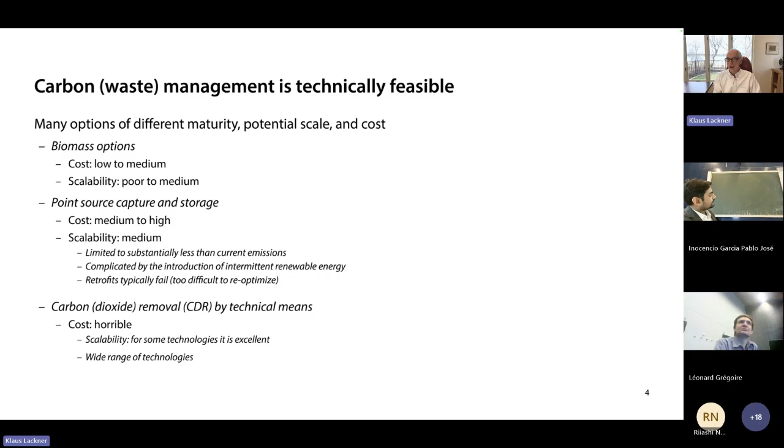So we have to get order of magnitude lower costs before that actually is viable. If you look at these technologies, there are a number of them available. They have a wide range of environmental footprints and carbon accountability.

If you look at ocean alkalinity, the accounting is quite complex. The duration of how long that excess alkalinity actually stays in the ocean can be debated. Some people argue it will take tens of thousands of years. Others argue that all the ocean will flow through a coral reef, the surface ocean, in the next few hundred years. And there's no guarantee that corals couldn't reset the alkalinity to where they want it to be. And it has an unknown, potentially large environmental footprint.

If you go to accelerated weathering in soils, that certainly can collect CO2 and can store it, presumably for quite long times. Accounting is now very difficult because you basically have to believe that it does what you think it does, and that it didn't flow away and get out of your ability to make contact with the atmosphere. And it potentially has a very large environmental footprint because you are basically spreading over agricultural fields what other people would call mine tailings.

Then you can go to ocean carbon capture with geological or mineral storage. I think here the accounting is quite straightforward because you have the CO2 in hand after you did all of that. Of course, you don't have the indirect emissions, but quite frankly, they apply to all of these things. The indirect emissions, which you get out of life cycle analysis, are very complicated and are very hard to get accurately accounted for. And the same is true for direct air capture, again, coupled with geological or mineral storage. The accounting is simple, again, except for the indirect emissions.

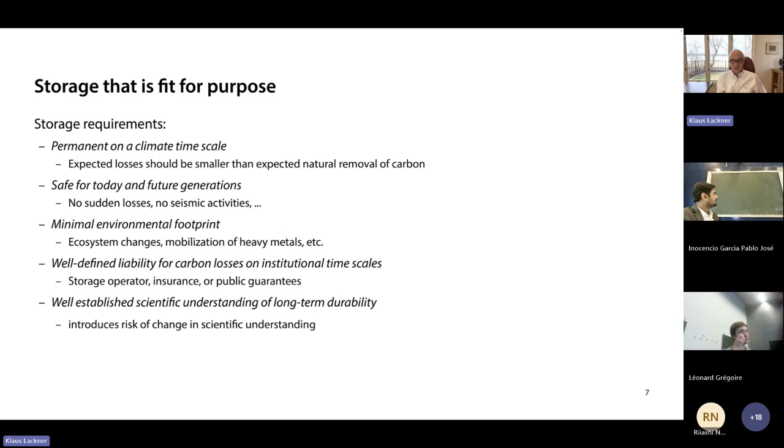I think there has to be a well-defined liability for carbon losses on the institutional timescales. You could do this with storage operator liability or public guarantees. And you need a well-established scientific understanding of long-term durability, right? That introduces, by the way, the risk that over the next 100 years, there's a change in scientific understanding, and we do have to make an adjustment for that. In that case, I would argue that carbon is lost, and I'm particularly suspicious of carbon storage technologies that promise 500 years, because I do not know how to continue after 500 years.

But if you look at it, there are solutions which are short-term. There are solutions that are long-term. I would argue most geological storage fits that bill. Most mineralization fits that bill. But technical CDR is definitely stuck on costs right now. Cost reductions, and I'll discuss this a little more in a minute, need to be on the order of about an order of magnitude. If we don't get 10 times cheaper, then fixing the climate problem could bankrupt the world, or alternatively render climate damages unmanageable. And of course, that could then also bankrupt the world, right?

The strategy in many ways, in my view, has to be learning by doing. We can do a lot of science around it, we can debate it, and we can make it a little better here and there, but ultimately we need to just do it, and then things tend to get cheaper. Think of wind, think of solar, think of lots of other technologies, from washing machines to your computer. There's plenty of precedents, but there's no guarantee that it always works. Nuclear power, for example, didn't work out like that.

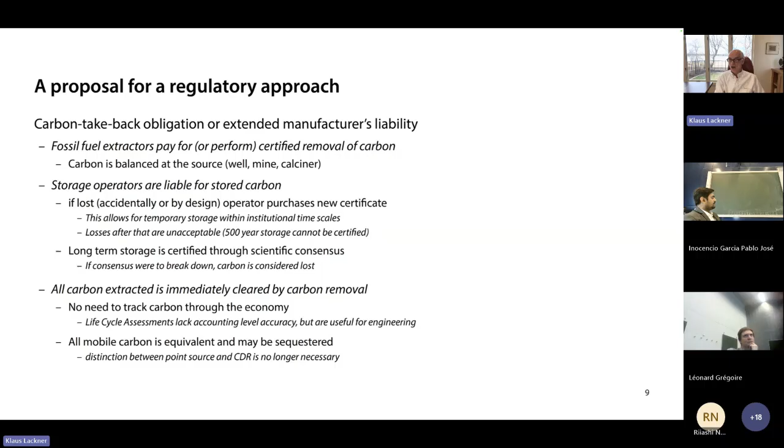And in this case, then also all mobile carbon is equivalent, and all mobile carbon may be sequestered. Right? The distinction between point source capture and CDR in a world which has gone that way is actually no longer necessary. So in my view, reducing the cost of carbon removal is that ultimate chicken and egg problem, right? Cost won't come down without regulations, and regulations won't be introduced until costs are low. So we do need in the beginning volunteers and niche markets where you can actually try things out and make it work. So here we have another proposal which we are trying to move forward and get on the table, and it's not all that easy.

We say we should differentiate from the start between legacy emissions, stuff which happened in the past, and continued emissions. And we build up negative emissions to remove legacy emissions as a public effort. That allows you to learn. That is sort of the voluntary side, and institutions and companies could help with that, right? You drive costs down through learning by doing for everyone, including industry, which will need it, right? In the process, you pay back the public carbon debt.

So take an extreme version of it, say we remove 200 years of emissions over 50 years. That means every first year, we don't have to be all that good because we remove 1800 to 1804. There weren't all that many emissions. As we climb up that curve, we are then 4 times faster than in real time, and in 50 years from now, we would have caught up, right? If we were to do something like that, we would get the learning necessary.

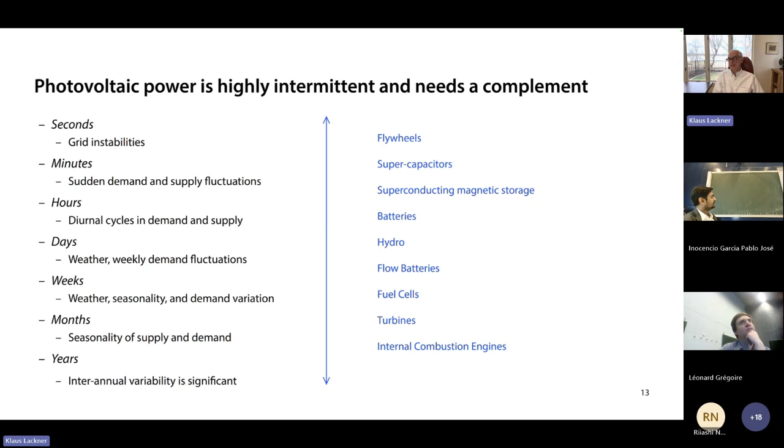Batteries will play a big role, but once you talk days to years, batteries are simply too capital intensive to make this work. I think the bottom end of that spectrum is undoubtedly done with chemistry. And I would argue there's an enormous advantage of being in liquid fuels, in other words, in hydrocarbons, because they have the energy density, they have the chemical stability, and they're easy to store, easy to move, and easy to transfer back to electricity, albeit at a loss of maybe a factor 2 or so, right?

So energy storage on the days to years scale is something they excel at. You can sit on an oil tank for a couple of years, and the cost of having sat on that is actually minimal. And right now, in the current environment, we all wish we would have more oil in storage than we actually do, right?

Energy for transportation, and it can apply to cars, trucks, ships, planes, and trains. And you may say, well, cars and automobiles are really out of that. Not really. I like one-on-one comparisons. Assume that fully electric car really works, and somebody comes along and says, I have this tiny little generator, maybe a fuel cell to get political sensitivities right, and it has 30 kilowatts, and I can keep the batteries charged while I go. Suddenly, that car lost 2/3 of its battery weight, probably a third of its total weight. It has a 1,000-mile, thousands of kilometer range, and it's all around better by having that combination. I think we will likely go back there if we can or need to.

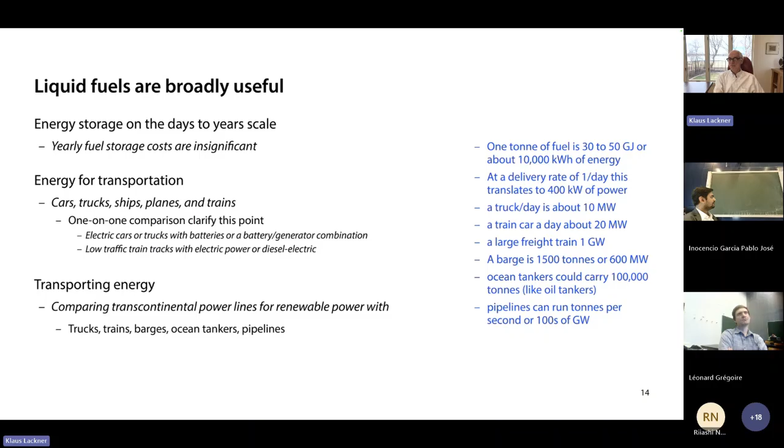And a transcontinental electric power line, which gathers photovoltaic energy over large areas and then stands empty 2/3 of the day, is not a good investment. So I would argue for that reason alone, liquids will play a huge role. And we engineers haven't quite figured out yet. We are trying to shoehorn everything in the grid when we really shouldn't. We should figure out how to bypass the long distance grid and make things work more locally.

So what's missing for such a picture, right? Cheap photovoltaic power, I would argue, is ready and is spreading fast. Conversion from electricity to chemical energy, think electrolyzers, water splitting to hydrogen and oxygen, but you have other options. That's technically ready, but there's little demand. And I think it's still too expensive for intermittent energy. You need to gain a factor 2 or 3 to make that really work. If you compare, let's say, alkali electrolyzers in Norway, they can run on cheap hydro, but they can't run unless they run 24 hours a day.

Conversion to useful liquid fuels with CO2 and hydrogen is close to ready. We know how to do this for 100 years. We can make methanol, dimethyl ether, alkylate fuels, diesel and jet fuel by various means. I think there's little demand for it right now because the oil is sitting there, but it's an established technology, and I would argue, and I'll come to that in a second, it needs downscaling rather than upscaling.

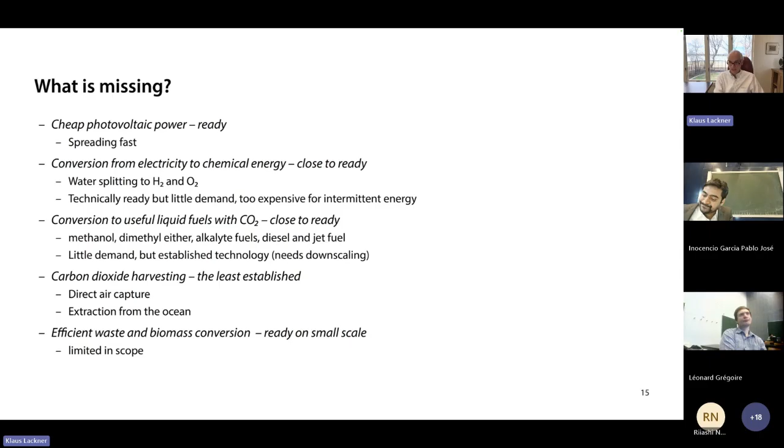I think the least established is carbon dioxide harvesting. Direct air capture, extraction from the ocean. That's where I think you have the hardest, the really missing link in this story. Of course, you could start with waste and biomass conversion, which lots of people do, I think it's ready on a small scale. It tends to be messy and make not the right stuff, and it's really limited in scope. So I would set that aside and move to the other ones, or be aggressive here too and convert it all the way to the right fuels. But ultimately, if you want to get the cost down and make all of these pieces really work, you need learning by doing to close the cost gap.

Right? And I think you want in every iteration, higher efficiency and lower cost. And one of the big questions one of my students looked into more than a decade ago now was the analysis of economies of scale versus the economies of numbers. It's numbering up versus size. And he made an argument that numbering up has real advantages which were not available 20, 30 years ago. And I think we should really look into that.

So if you compare sizing up versus numbering up, chemical engineers think about sizing up, right? And they have the concept of the economies of scale, which basically said that the cost is a function of size, and it's a power law in a simplified version where you simply say it's some power alpha, which tends to be 2/3, right? Numbering up relies on learning rate in manufacturing. It's an empirical observation that if you make the same thing over and over and over again, it gets cheaper.

And those folks didn't write down a power law. They said, well, if I double it, I get a factor epsilon, where epsilon could be around 0.8. So then, of course, I can say, well, the nth one is the first one times that epsilon to the log base 2 of that n, because basically for every power of 2, I get a factor epsilon. And it turns out I can integrate that and sum up the cost of all of the ones I built, right? And I put an approximate because I integrated rather than summed.

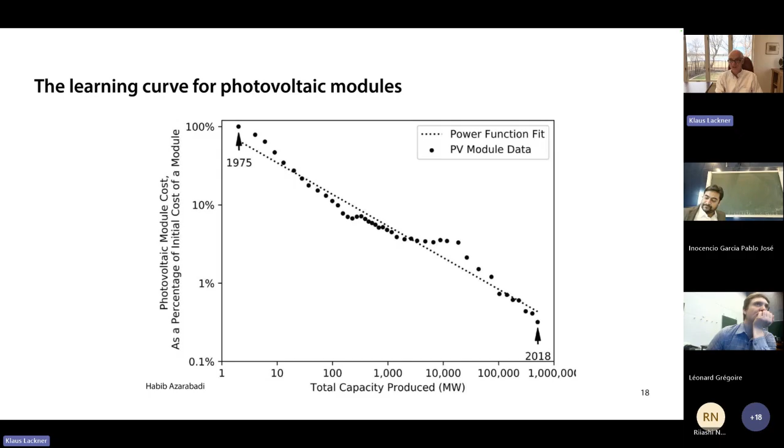Ask about the poor engineer in 1975. I'm coming back from today and say, I can tell you for a fact of the $1 you spend, 99.5 cents are gone. You tell me what you expect that last half cent you couldn't get rid of is for. They couldn't possibly do that even if they knew what I just told them. So bottom line is, we don't really understand how the learning curve comes about, but it's iteration and iteration. And of course, there has to be a floor. So you should add to that power law here the assumption that there is an irreducible cost, which just doesn't go away.

So why have people always thought bigger is better, right? Physics, I would argue, drives to an optimal size. And Eric Dahlgren, when he worked on it as a PhD, looked at many examples. And sometimes bigger is better, and sometimes bigger is not as good. It depends on your specific situation. And I can't help pointing out that if you look at a Fischer-Tropsch process or a Haber-Bosch process, what in the world makes a surface contact catalyst, which needs to shed heat, like to be in a very large tank, right? It really cries out to be smaller.

But personnel costs tend to drive you large, because a power plant with a gigawatt doesn't need 100 times as many people as a 10 megawatt unit. So as a result, I would argue, or Eric in his thesis argued, a large driver is cost of personnel. But automation pushes that the other way. In the 1980s, we couldn't have possibly automated that away. Today we can. And so how to optimize cost by numbering up or scaling up has changed in the last few years, because we have learned that ability.

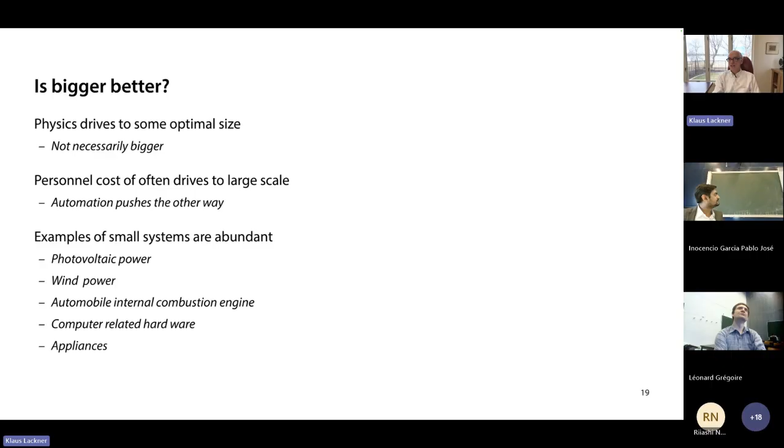And there are small systems, they are abundant, and they have dramatic learning. Photovoltaic power is an extreme case with its 24% learning rate. Wind power only got 14 or 15, and I would argue a large fraction of that is because they tried to get big and they didn't get all that big. The automobile internal combustion engine, I already pointed out. If you look at computer-related hardware, you get lots of examples. And appliances: your microwave has a little microwave generator, which is dirt cheap. Light bulbs are dirt cheap. The ingredients of your iPhone, your camera, the cost of these things have come down by factors of 100.

There's less risk in innovation. You can try out a prototype, and if it didn't work, well, you just wasted $10,000. If it turns out you need to build a $1 billion plant before you really know that it works, you better be very conservative in your choices. You can also drive modularity in many different ways. You can plug and play. You have compressors, all these subsystems, and you scale those down. There are far fewer scale-up issues. If you stay with a scale, the physics doesn't change. If you move from one physical scale to another, the physics tends to change.

But automation is now your new bottleneck, because if you make $3 worth of output, I can't have a person watching. You have to deal with every normal operation, and probably quite a few abnormal events need to be automated into your system, because you can't afford hovering over that machine. And of course, there are faster turnaround times, which means the premium for a long lifetime of your equipment suddenly goes away, which particularly at the beginning is actually important. If you think DAC today can get 10 times better, you don't want an old DAC sitting around from 10 years ago, because it is just too inefficient.

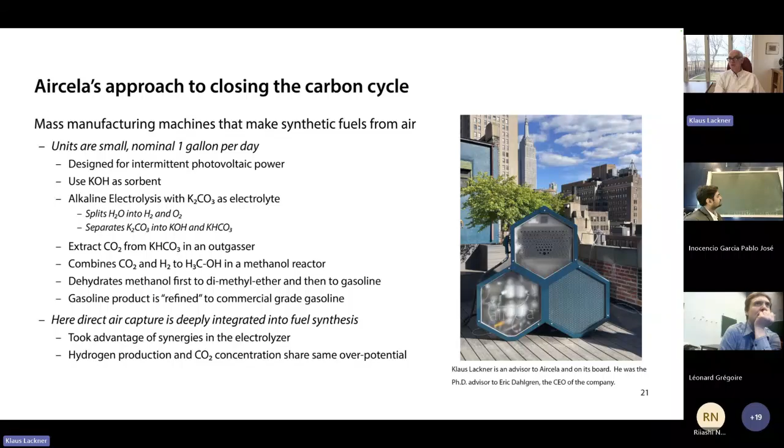So the lessons learned for direct air capture: there's a significant advantage in your energy balance if you need to make fuel, because you store a lot of energy in the fuel. And if you're 50% efficient in this, you're proud of yourself. And you can hide behind that the fact that carbon capture wasn't all that efficient. It greatly simplifies the problem.

Blowing air and thermal losses in sorbent generation are dwarfed by chemical energy demand. The kinetics, it turns out, is not an issue. It's no better than most DAC, but it's plenty good enough for these things. I would actually argue we sometimes overthink sorbents. Low-cost photovoltaic power is absolutely critical to make this work. Energy efficiency is secondary to cost in all of this.

Right? We are collecting energy, and we are not all that good at using it, but because it is so cheap, if it's a dedicated solar panel, we are not squeezing the efficiency, we are squeezing the cost. And I would argue generally direct air capture has to learn how to deal with that intermittent power. And we argue that simple is better. Alkali electrolyzers are much more easily managed than fancy high purity demand requirements.

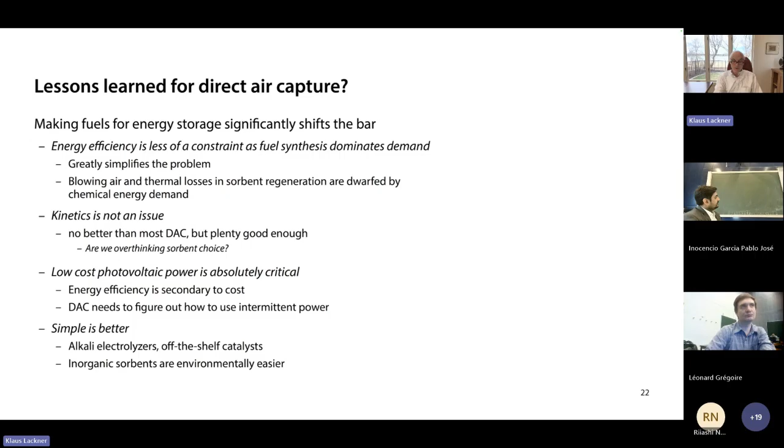And we use off-the-shelf catalysts. There's nothing fancy about our chemical reactions. Yet we made perfect methanol, which was clean, no formaldehyde, no ethanol. It was pure methanol after we squeezed the water out, which of course you have to do. And I would argue inorganic sorbents are environmentally easier, and that becomes quite clear looking at this system.

One of the other lessons we learned is that modular mass production lacks off-the-shelf modules. We are coming into a chemical engineering field. The units of operations only exist on the wrong scale. There are lots of things which are not difficult, but nothing is readily available. Compressors, pumps, heating systems, cooling systems, all of that, we have to reinvent the wheel, right?

The process design for small scales is actually different, but typically simpler because you have exquisite control over them. You can do things at 1/10 of a degree if you choose so. Low cost in electronics and appliances hints at savings, right? The new challenge is control systems. Everything has to be automated, but it eliminates the challenge of scale up.

And computer calculations, it turns out, are cheap. One Pi can do everything we need. Right? Sensors are often expensive, and we are spending a lot of time thinking about how to make that easier. And I would argue sometimes we want cheaper sensors and more calculations to calibrate.

Ultimately, it requires a paradigm shift, which is not just limited to DAC. We can think about this approach to desalination, to power, to all sorts of things. And I think this will create a revolution where the old dinosaurs will stay where they are, but new technologies will go small.

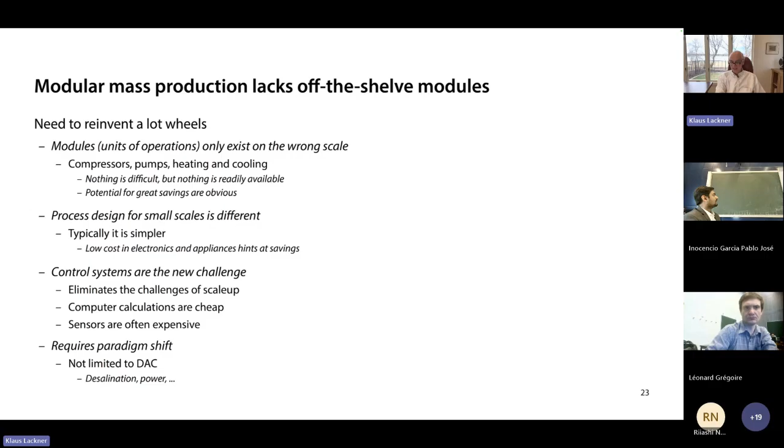I would argue in all of this discussion, and I'm running short on time, I'm afraid, is the DAC is the bottom. And I think we need to get it down to $100 a ton, whereas right now we are more like $1,000. And I would argue $100 is sort of a reasonable number. And one way of looking at it: how much does it hurt the economy if it had to do it overnight by simply applying it? Alternatively, some other technologies will displace it because they happen to be cheaper.

So if you can get to that scale, dealing with the problem is economically manageable. If you put another zero on and say it's $1,000, which is probably closer to where DAC is, then it would ruin the economy. So we have to get from $1,000 to $100.

And here now it matters, can you really get there, or is there an irreducible cost that you cannot get rid of? Of course, learning rates now matter too. Right? 20% learning rate implies a 10-fold reduction in cost requires a 1,000-fold increase in cumulative production. That's nothing. We are at kilotons a year, so we end up at megatons a year. Well, megatons a year are not climate relevant. That we are entering the scale of merchant CO2, which is used in industry. And moving from kilotons to megatons is not what does it.

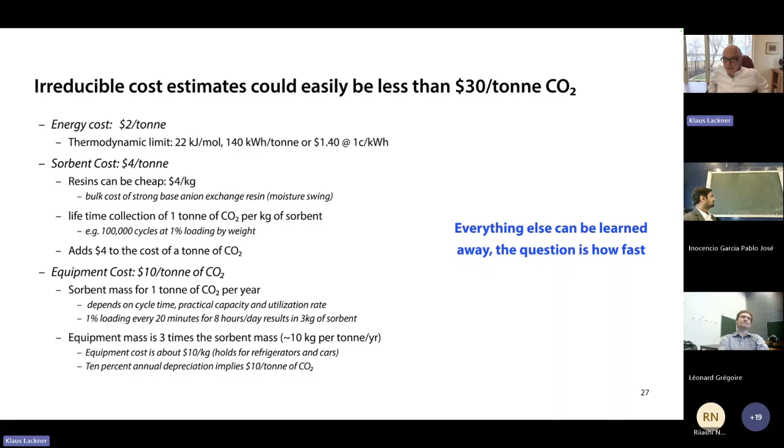And that in turn, I'm now arguing that I need 3 times the mass of equipment. And I think that's quite conservative. But empirically, we know that cars, appliances, all sorts of things cost around $10 per kilogram if they are mass produced. So taking that number and 10% annual depreciation, we're talking about $10 per ton of CO2. So adding these numbers up, I'm well below that $30 a ton. So I think the case can be made that the irreducible cost, which I'm not saying we can hit in the next few years, is actually small enough that you can, just like photovoltaics, run down the learning curve without being stopped in the middle.

So you've got to figure out that you can't ignore that. You may not understand where it's coming from, but empirically it's there. And we ignore it at our own risk. And if we follow a 10% learning rate with a technology which uses calcium carbonate, and therefore really can't get below $90 a ton, you're stuck. You will not get the cost down, even if you hypothetically say we hit world emissions.

So we got to figure that out. So what do we need to do to DAC to get affordable? I think process engineering is central to improve DAC, which is anathema in the US because all academic institutions are very weak at process engineering. We need it. That's the central point.

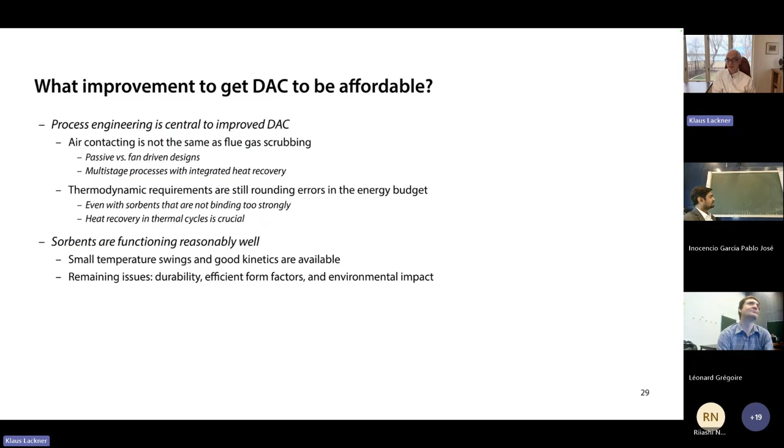Sorbents are functioning reasonably well in my view. Small temperature swings and good kinetics are available. What I think remains to be understood is durability, that 100,000 cycles, efficient form factors, and environmental impact. That's where the research on sorbents, in my view, needs to be.

We looked at heat recovery in a clever way where we simply said, we have a hot water tank. We take water into a small container, which flashes some of the water into the steam regenerator, which is evacuated. And the rest of the water, which is now colder, is pumped back into your heat reservoir. That pressure jump, because it's liquid water, is small and can be nearly ignored. Then the steam heats the sorbent and slowly CO2 comes off. We gradually, gently pull that out.

And as we compress the CO2, we recondense the water at 100 degrees C at 1 atmosphere. And when the CO2 release ceases, we keep sucking on the system to pull all the water out. And if you pull all the water out, we pulled with it all the heat back out. And now we compress that steam back to 1 atmosphere so that it condenses against the heat reservoir we have.

And so we basically embedded the entire DAC regenerator into a refrigeration system, into a heat pump, which is driven by water as the working fluid. And in doing so, we can greatly enhance the heat recovery in the system. We can basically get it all back out, except the little bit which we needed to make the CO2 work.

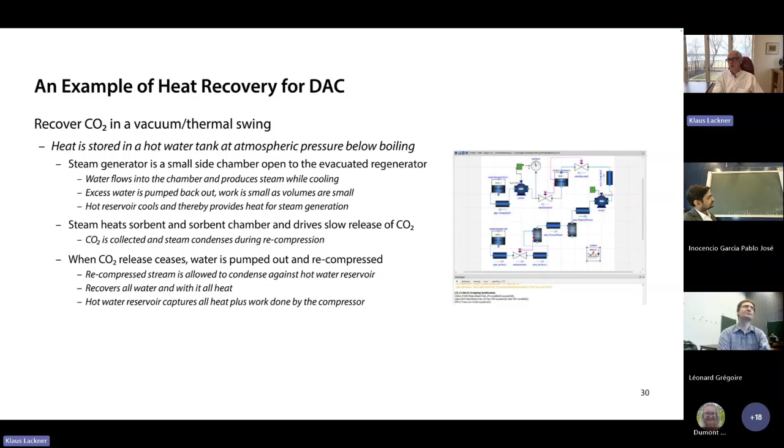I think we need to move to simpler sorbents. We started out with gel-type quaternary ammonium sorbents, which had a moisture swing. One of the things which occurred to me is I think of this as absorption, and I had an endless fight with the chemical engineering community, which always thinks of it as adsorption, but I think it's the water in these interstitial spaces in that gelatinous mess which is actually where the chemistry happens.

One of my students modeled that in great detail. And you can explain everything by saying there's diffusion in that water. And now it's an absorption where there's a scaffolding of resin around it to hold things in place. The water in these resins can be 40% by weight. So water transport is not in gas-filled pores. The diffusion constants are on the order of 10 to the minus 12 meters squared per second.

So therefore, I can invert that and say I have 20 minutes for things to happen. That implies microns as the typical scale size. Do we really need nanopores at the MOF scale? Or are we much better off to take these gel-type materials where we actually happen to have started? Nanopores get plugged with water, with contaminants. They're mechanically and thermally unstable. You just asked for a whole bunch of problems which you can get around.

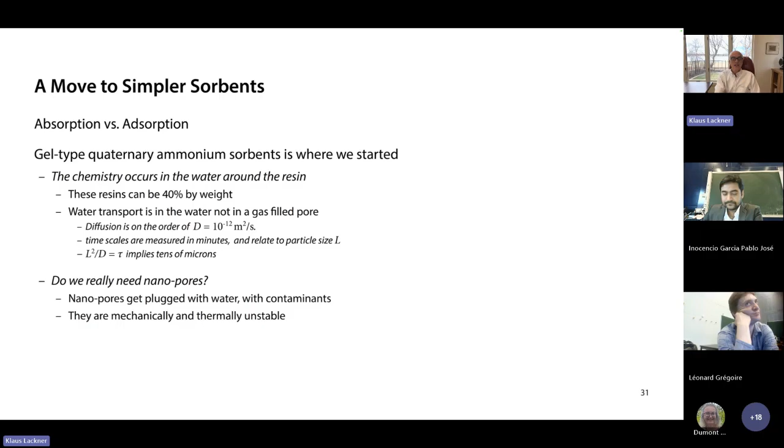And I think I would like to go back to where I started on this. We also need to learn how to power DAC with carbon-free intermittent power. We need to take advantage of clean and cheap energy. Renewable energy is clean, but batteries would make it expensive. You can shift your energy regeneration in time if you use cheap sorbents, which are inorganic. And heat and coolth offer storage options.

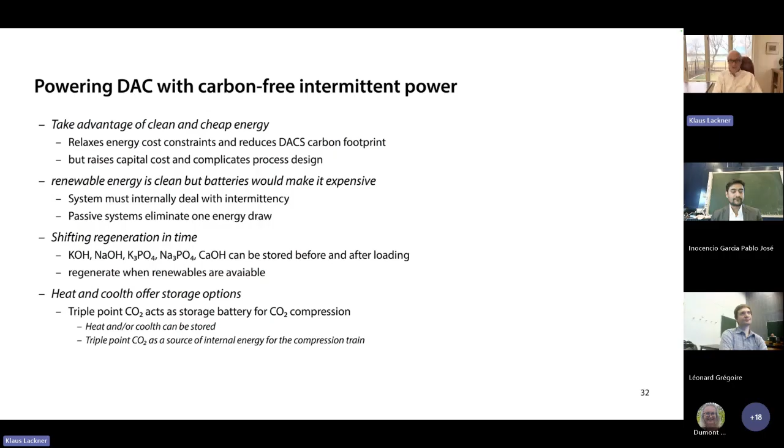Right? We are working on a triple point system where the triple point CO2 stores energy and is cold enough that it actually can take CO2, which is released, and compress it simply by cooling it. And so we are looking at various ways of dealing with that. I think the other big research issue, in my view, is end-of-life considerations, particularly for the sorbents. Small losses are likely and unavoidable. How do we deal with that?

Would inorganic sorbents raise less concerns? Keep in mind they are carbonates when they get lost. And how do we deal with decay products like amines and nitrosamines? Right? We need to think about all of that and the impact on water and water quality if we sit out there with tens of thousands of these devices in one place. That can be a water producer or consumer. Neither is ideal. And we need to look at the stability of sorbents.

Conclusions. Cheap renewable energy with dispersed, remote, and intermittent operation changes the electric power business completely. Right? Fuel-based electricity is forced to operate intermittently, mirroring renewable power generation. Renewable power should be viewed as raw electricity rather than consumer electricity. And there's a big price differential between the two. And it will be sufficiently low in cost to feed batteries and fuel synthesis. And direct air capture provides the carbon for these fuels. That's how I see this happening.

The existing power infrastructure, on the other hand, is ill-equipped for this transition. Nuclear power, thermal coal, natural gas combined cycle plants, they need to operate steadily. Internal combustion engines, aeroderivative turbines, and maybe fuel cells are likely replacements. Long-distance power lines can't afford sitting idle. Transportation of liquid fuels will be advantageous. Batteries round out that picture, but are unlikely to dominate it because of the long-term mismatches.

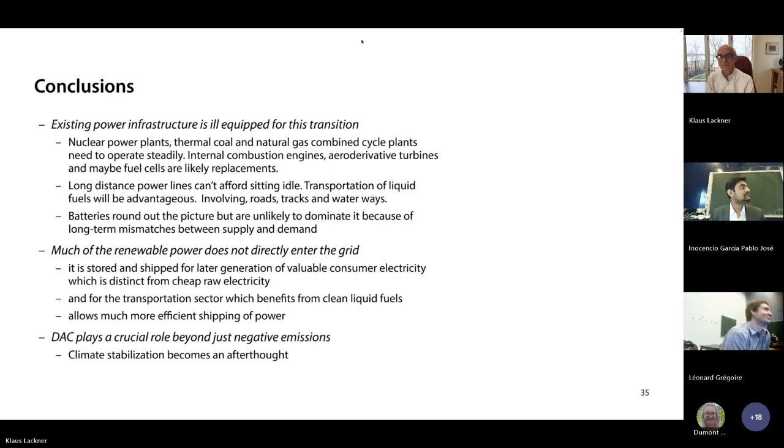You may write your questions on the chat box on conversation so I can read them. Or maybe you can raise your hand. Yeah. I don't know if you can hear me when I speak loud in the room, or is it too far away? You can barely hear you, but with a little help, we'll work it out. It would be good if you come closer a bit. I think we have a micro. Maybe we can check it at some point. I don't know how it works.

Okay. Thank you very much for this very nice talk and very refreshing. And it's good to hear a little bit about that, to get optimist again about what can be done and what is the path forward. My main question here would be, what is your view on recent political movements, in the way that it seems that our civilization is not taking the challenge of climate change at the right level. Things are not moving so fast. You mentioned cost needs to get down, but political will is needed for that. So it feels a little bit, when you hear political discussions and the way the world is evolving, that political people think, okay, now the time for change is kind of over. We can try to adapt, but working on mitigation is maybe not the main priority right now.